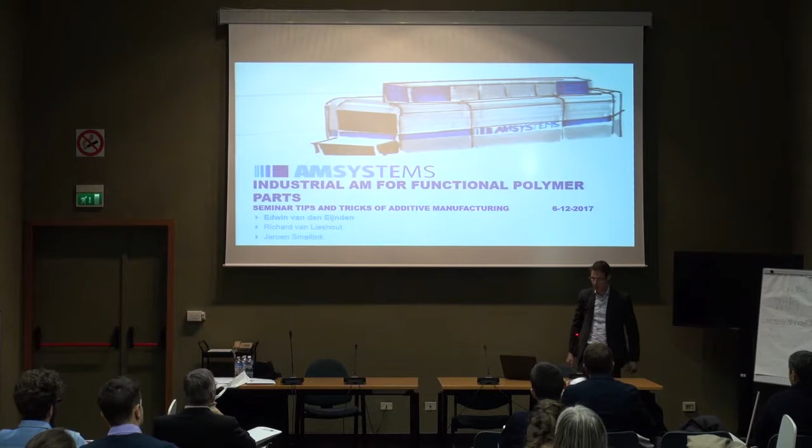I will give a presentation on our activities in additive manufacturing. I work in a department at TNO that develops additive manufacturing equipment, and we focus mostly on polymer printing, but I will also show some other activities in this field.

To give you an overview of my presentation: first, we have an initiative collaborating with the Technical University of Eindhoven, which we call the AM Systems Center. I'll come back to that. For AM it's important to keep the application in mind, so I'll give you an application for additive manufacturing we're looking at—automotive polymer spare parts printing—and explain why we think this is a good proposition.

An important aspect in meeting the requirements for these spare parts is cost, and I'll give you our roadmap on reducing this cost. The second part is quality—it has to meet the demands. But we'll have to see how far I get, so I won't rush. I'd rather get the first part right than rush into quality control.

So starting with this initiative: we at TNO focus more on applied research, while the Technical University works a lot with PhDs and postdocs. Together we have a broader proposition—for early research we can put PhDs on the topic, and later we get more involved as TNO to make it applied.

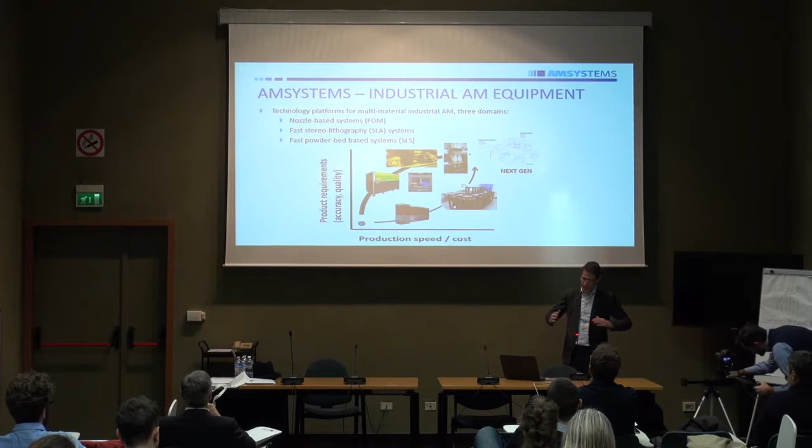We also have a part working on selective laser sintering—I'll explain that technology in more detail since it's too important for the story to skip. There, we mostly work on throughput. In the end we want both quality and throughput to come together, with good quality and a good cost price. That's the next generation, Printvalley 2020, which we're working on.

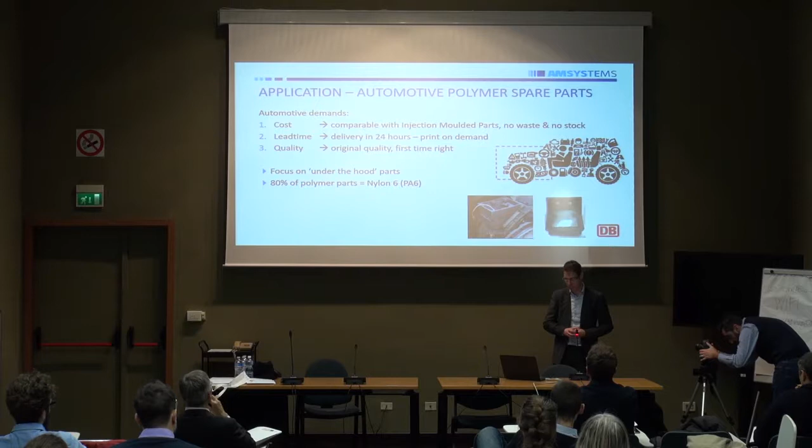To tell you more about the application we foresee—automotive polymer spare parts—cost is an important topic, and it's very hard to beat injection molding for large quantities. But I visited warehouses where spare parts are stored for years, and not all of them are sold; some are scrapped. Taking all this cost together, we believe AM could be an option by printing on demand. But printing on demand doesn't mean waiting a week for spare parts—we aim for 24-hour delivery.

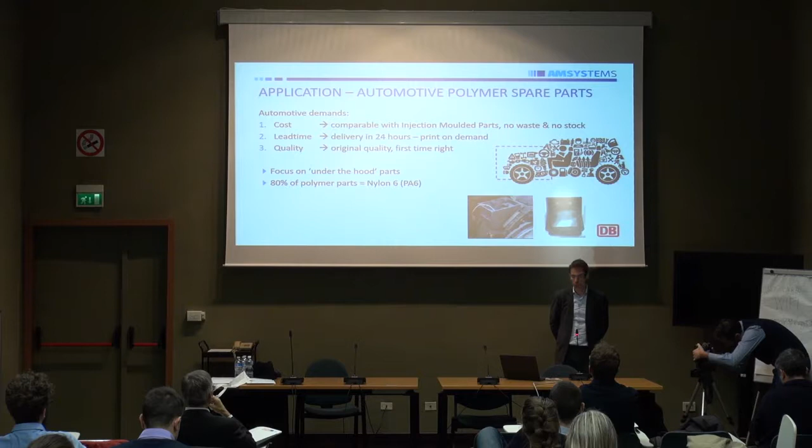For automotive parts, the quality has to match the original part, and this is still a very broad topic with a lot of aspects. Where we want to focus first is on under-the-hood parts, where PA6 nylon parts are already used a lot due to their high temperature resistance. PA6 is a material that can be processed with selective laser sintering.

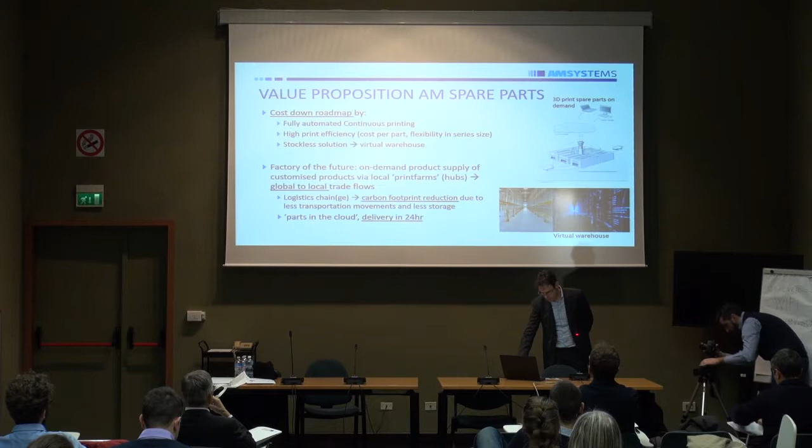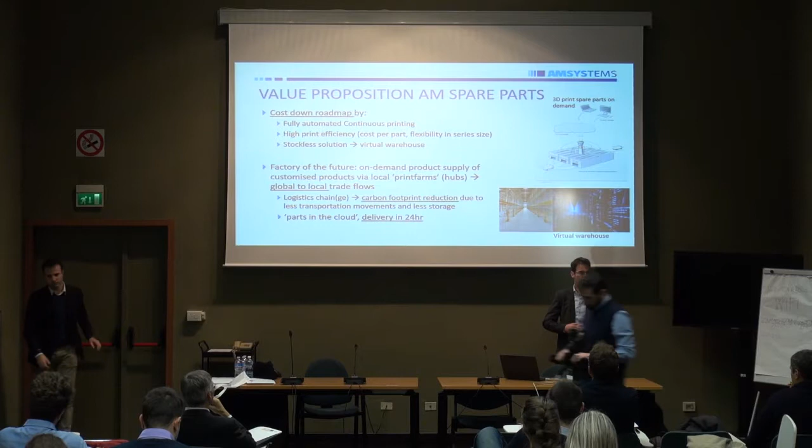How do we think we can realize this? The process now takes quite a long time, more than 24 hours sometimes for printing, and even then it takes a lot of labor to get to this product.

So we're aiming for a high-speed printer and also to automate some of the post-processes. By printing faster, we're aiming at 24 hours so we can deliver without storing parts all the time, but print on demand. The idea is that you have regional hubs and print at the region where you need the parts. Of course, this is still

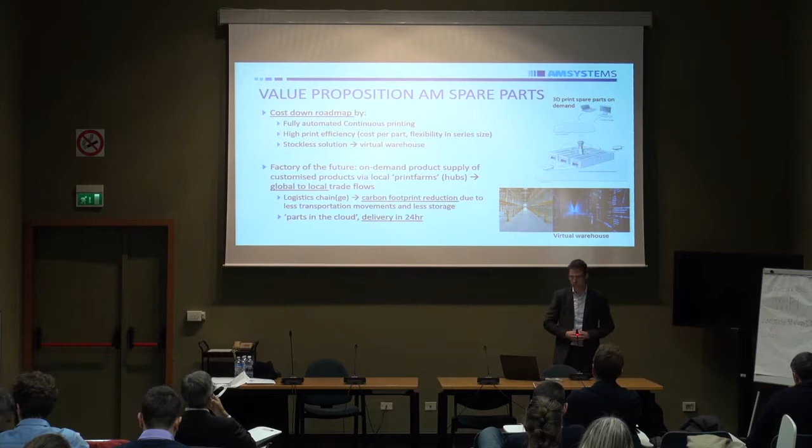not reality. So looking at the chain now, you see a spare part, you see these big warehouses in the middle, and then in the end you have the automotive transportation system.

What we foresee is that you print it on demand, and to make it cost competitive compared to injection molding - making an injection mold for one part is not very cost efficient. But for AM, it is. It doesn't make a lot of difference in cost if you make 1 or 10 parts.

So what you typically see is that up to a certain number, AM could be attractive, and now we position it at 1,000 to 10,000 parts - I think that's already quite high. And of course also the complexity: with AM you can make very complex parts, even parts you can't do with injection molding. That aspect is also important for metal printing.

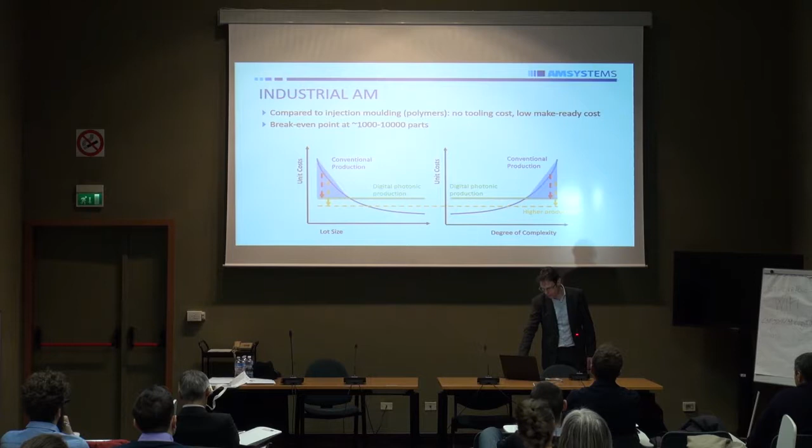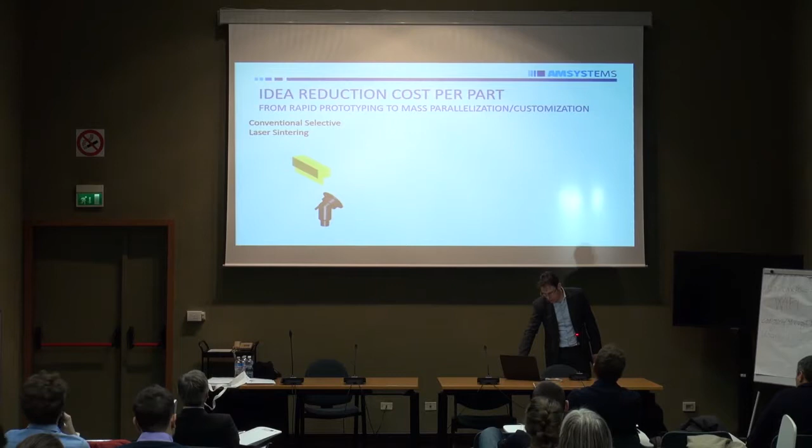So our proposition is to reduce this cost per part. What's the idea? If I go to selective laser sintering, the steps are coating a layer of powder - polymer powder, typically PA12, but it can also be PA6.

Then preheat it, and then selectively sinter the powder particles together, and then go to the next layer, as you saw in the animation. But typically these 3 steps - recoating, preheating, sintering - are done in series. And of course you can make these process steps quicker.

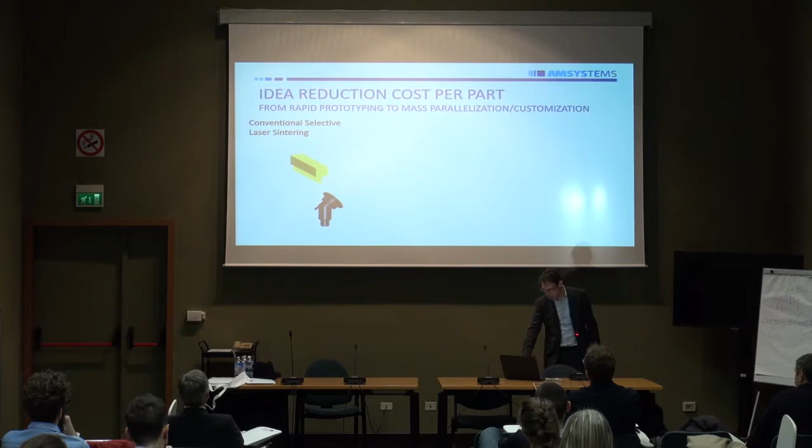For example, if you make the process steps 3.3 times quicker, the whole process is 3.3 times faster, as you can see here. But

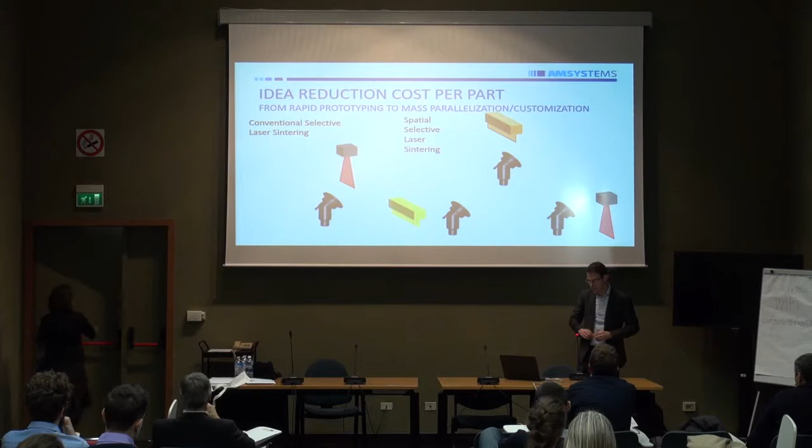what we work on is not having one build chamber moving its processes over the build platform, but having your processes fixed and moving your build platform from one process to the other. Here you see these 3 process steps next to each other, with 3 build chambers in this example, and the build chambers are moved from one process station to the other.

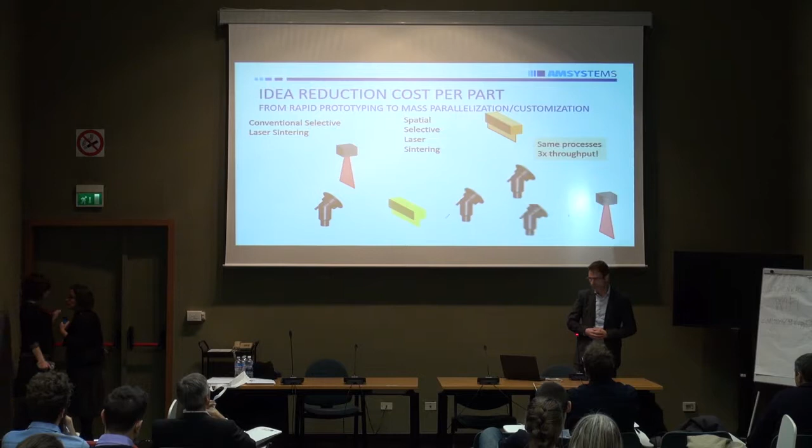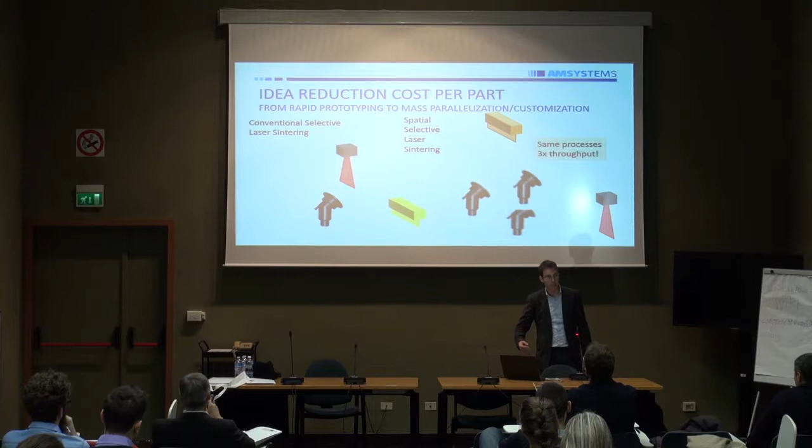So if you have the same processing speed, you already have 3 times the throughput, because in the same time you have 3 build boxes being manufactured. But if I now make my process 3.3 times faster, the throughput gain is 3 times 3.3, so you have an increase of 10 times. That makes a much bigger step.

Then on the automation and labor part, what you typically see now are a lot of standalone machines. I already see on the Formnext some steps, like a robot picking out the build box, maybe with AGVs too - but typically you have a lot of these machines and you have to handle all these build boxes. Our vision is more to go towards build boxes moving all the time through a lot of process stations, and we think automation of this system would be easier.

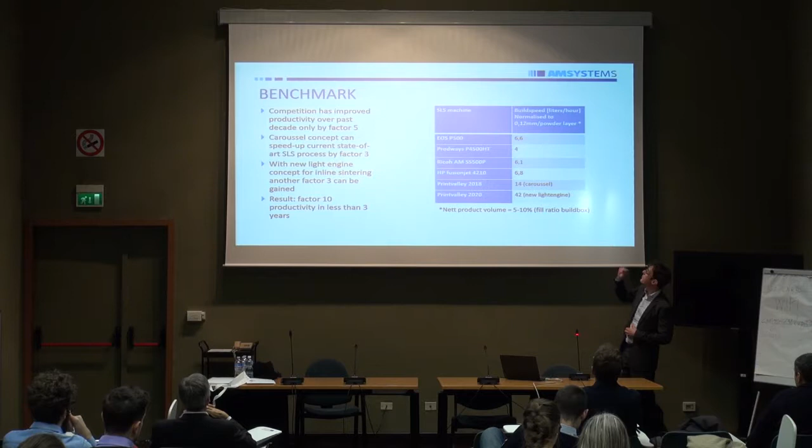To do some benchmarking - how do you compare these different systems? We do that by how many liters per hour of product you can produce. For example, this new system, the EOS P500, in the brochure they say they can produce 6.6 liters per hour. And the other systems, if you look at the Printvalley,

with the same process you can make almost a factor of 3 improvement, so you make a big step in throughput. And that's even with the carousel. If we speed up the processes, you don't just get the 3.3 gain, but a factor of 10 - so 42 liters per hour becomes realistic. That's a big step.

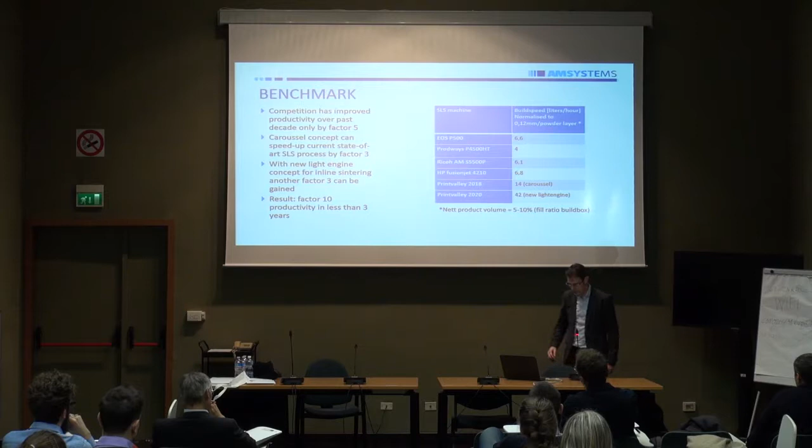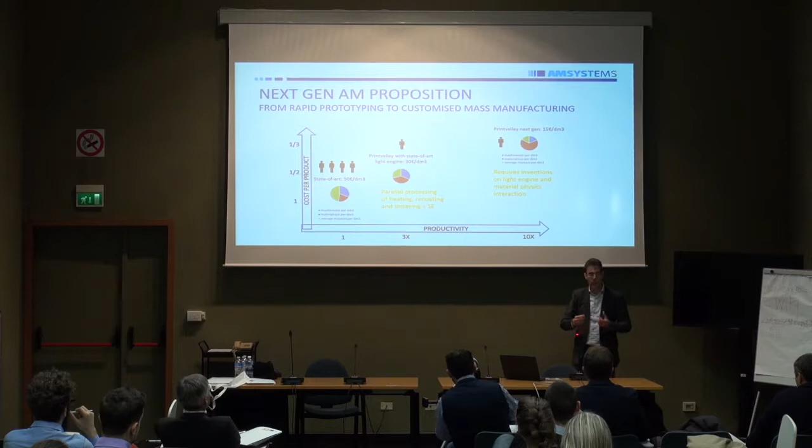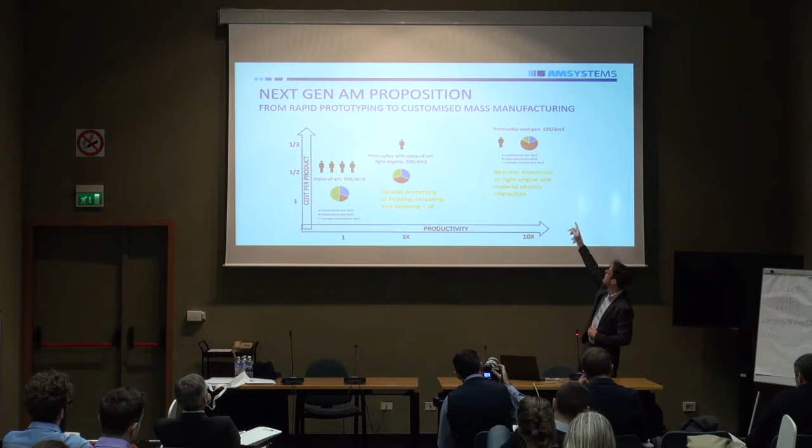Because machining and labor is still an important part of the total cost. If you go on, this labor and machining become smaller and smaller, and at a certain moment it doesn't make sense anymore, because really the big part of the pie is material cost. So the next step would be to reduce material cost. But still, you made a big step in cost there.

We saw a research project on the internet that compared the two technologies, asking quotes from hubs that used SLS and hubs that used Multi Jet Fusion technology. Surprisingly, the cost was quite the same for low and medium numbers. What was different was the lead time. With Multi Jet Fusion, they could provide the product in 4 days instead of 7. So a step is made, but not really a breakthrough in cost at the moment.

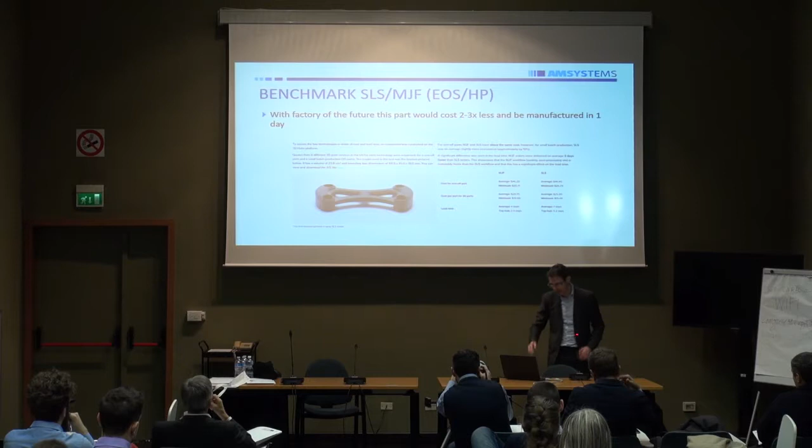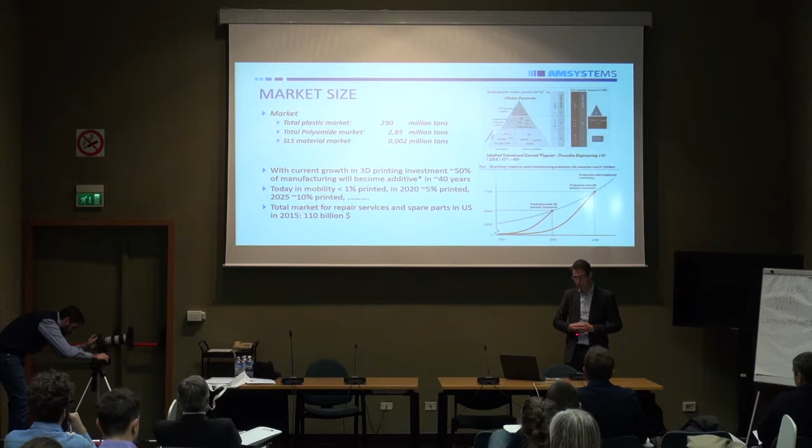But recently a big Dutch bank published a report foreseeing very big growth in additive manufacturing. Of course that becomes important, because now it's still quite small, but if you believe these figures from ING, in 40 years or in 5, it becomes really an important share of the total plastic production.

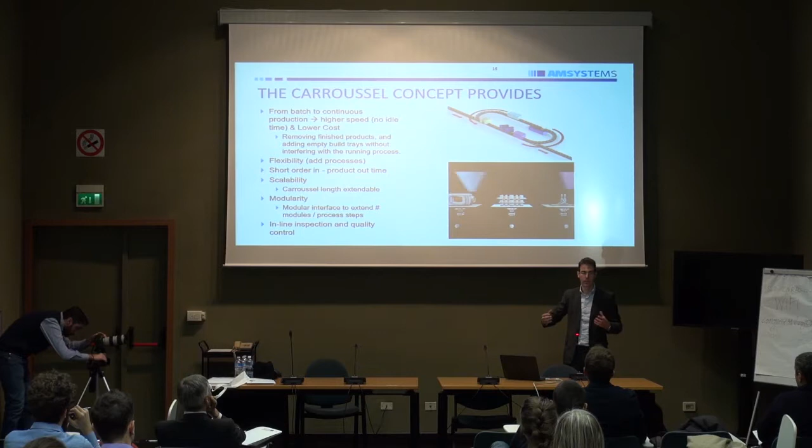So to come back on this carousel approach, why do we do it? One reason is you can put these process stations in parallel. You can also scale it, make the carousel bigger, add more process stations. You can even add more processes. For example, now we discussed recoating, heating, and sintering.

You can do inspection, or for example add electronics, an additional material. If you did that in the traditional way, it would cost a lot of additional productivity because you added more steps in series. But here you can do it in parallel, just by making the carousel bigger.

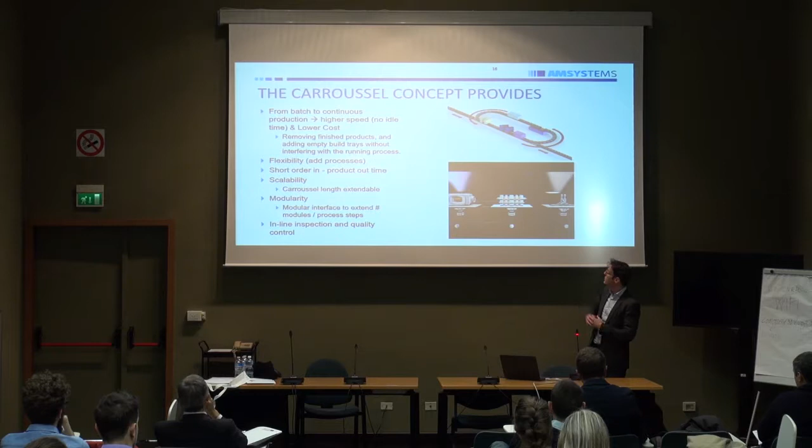So the movie you saw was really a vision in the beginning, but we also have actual builds, not just animations. I'll show you later the generation recently finished in an EU project. But the first generation, I think the project ran around 2009. It was more on inkjet printing, and we printed a photopolymer UV resin, and later wax print heads, but it was not really additive manufacturing—more like putting processes in parallel than making a true 3D printer.

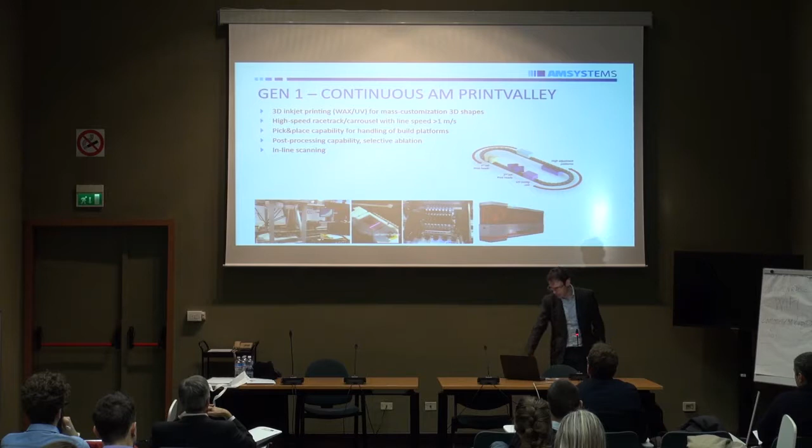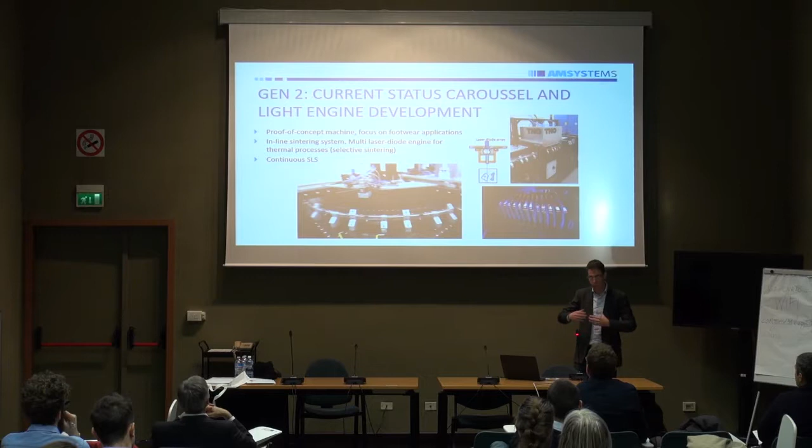In the second generation printer, we didn't print, but moved to selective laser sintering. The innovation there, compared to generation 1, was that these build boxes could be moved individually with different speeds. Another innovation: normally you have only one laser source, but with selective laser sintering we moved to a laser diode array of the complete width. I'll come back on that later.

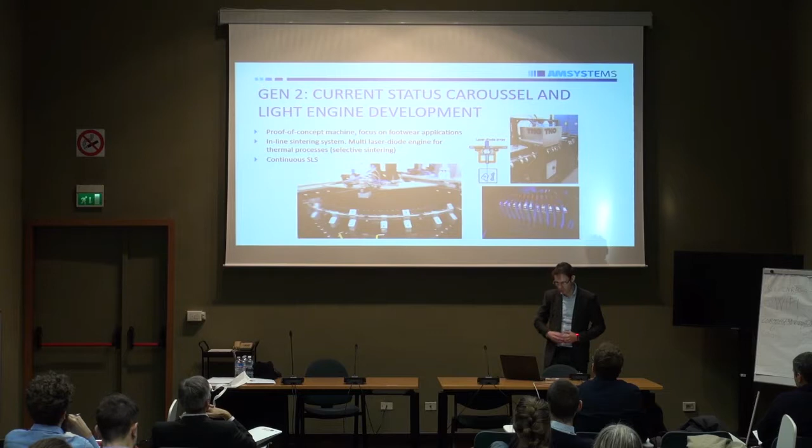Here you see how these build boxes can move, and everybody asks, can your processes keep up with the speed? Up till now, not, but of course the build platform shouldn't be the limit, and you can see it can move quite fast. On the right picture, which I'll come back to later, is this light engine we developed, and you see it also on top.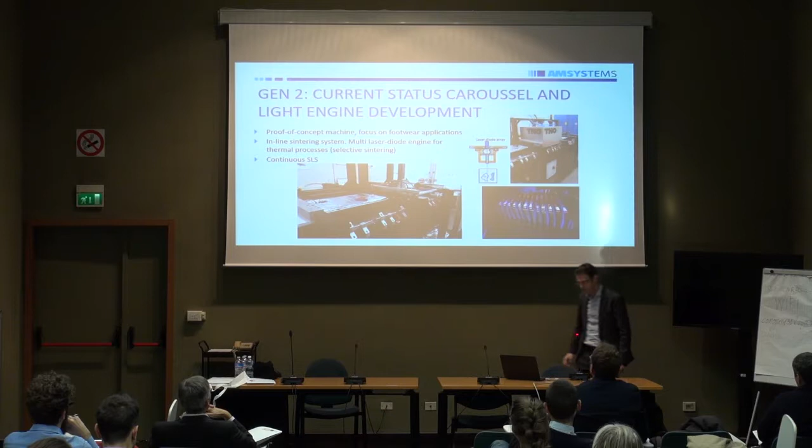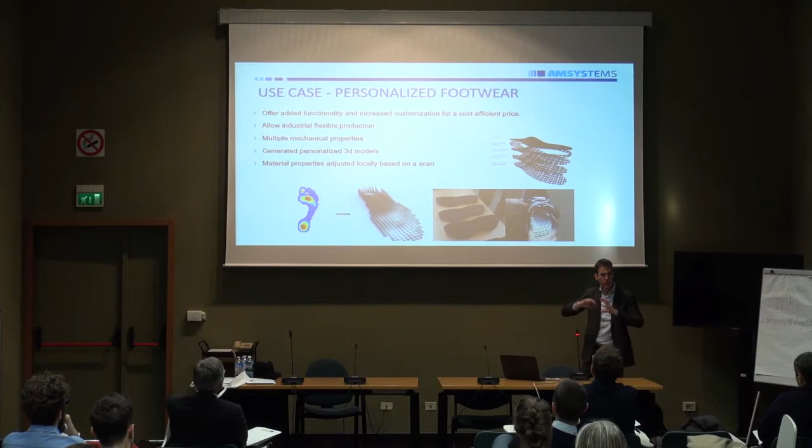So what was the application? It was the Additive project—maybe some of you know it. The application was printing insoles. You can imagine that for insoles, customization of your product is important, and you can even change the stiffness. As you can see, it's really like a lattice structure, and you can change this lattice structure to adjust stiffness where you need it.

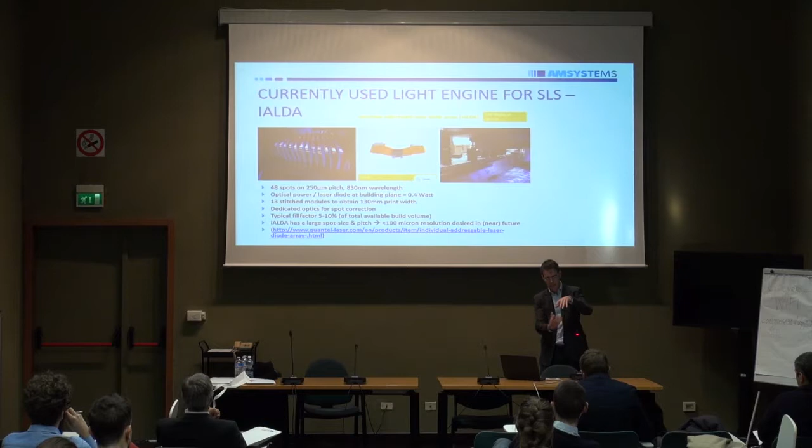So to tell a little more on this light engine, because that was also a big step: we looked for commercially available laser diodes, and in the end we found an IALDA module. It consisted of 48 spots, and we developed the optics and control around it. In the end, we had 13 of these IALDA modules parallel to each other, covering 13 centimeters of product. By moving your build box, like the insole, in the length direction underneath this light engine, in one go you had the complete sintering.

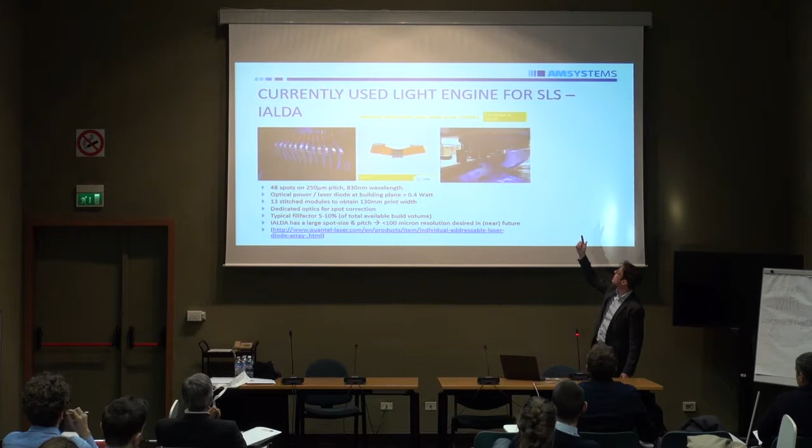So here you see this build box moving. You see these spots - each laser diode gives one spot, because with this demo they are all put on, and in the end you get complete sintering.

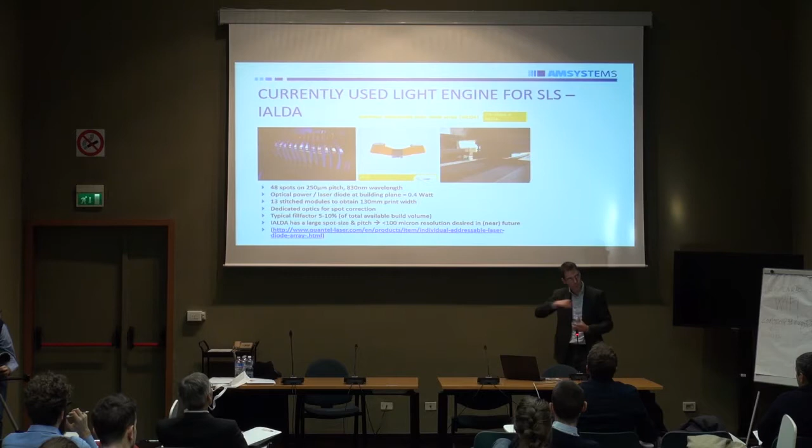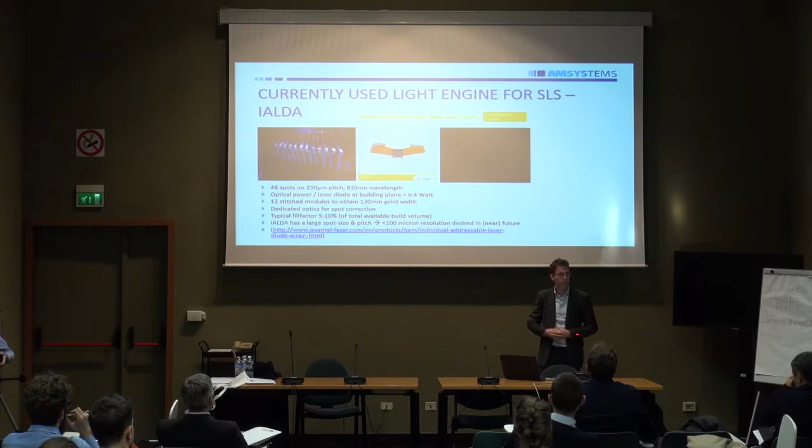What is important here is the speed is not that high, if you can see it. You saw these build boxes going very fast before, but this is not going so fast. To make it faster, you need the right power of these laser diodes. Until now, this generation we believe is competitive with the current CO2 approach, but it's not really a big step. To make it a big step, these laser diodes and this light engine have to be improved - I'll come back on that later.

In the beginning I said there are two parts, quality and cost, and at the moment we're working on the Print Valley 2020, so it's really a new development. I'm the project manager of this project, and we're finalizing the designs.

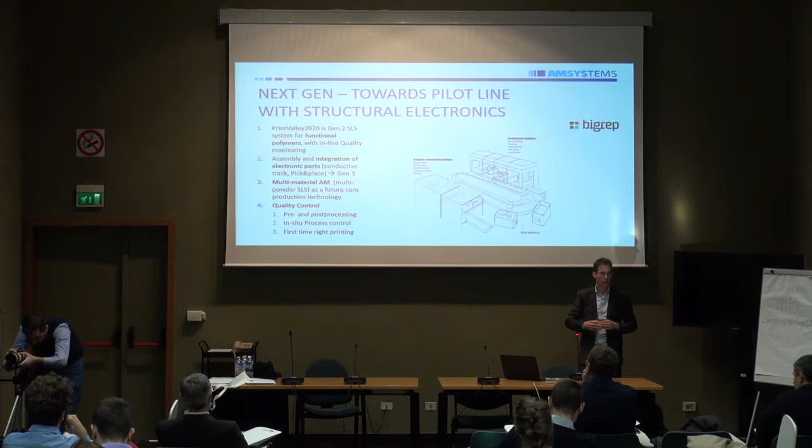What we're adding here is more processes. We had these SLS process steps like recoating, preheating, sintering. Now we're adding integrating electronics, so the build box can move to a station where electronics is integrated, and it can do multi-material, so you can have more materials during printing. The third step is also inspection, that we do inspection during printing.

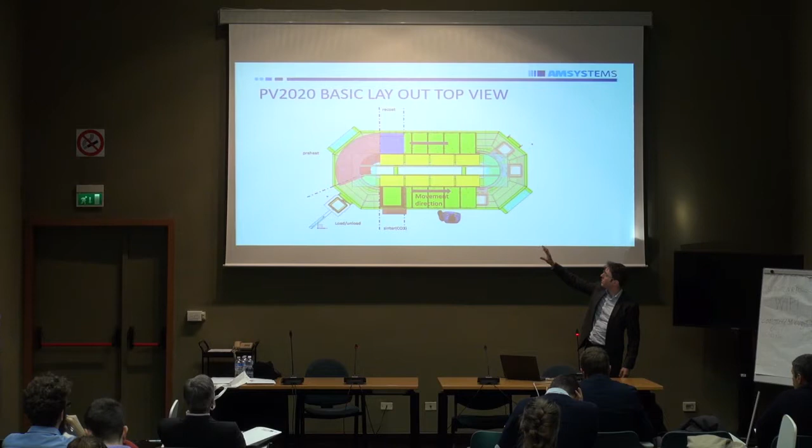This is the top view of the system. What you see now, we have a sinter station, a recoater, and preheating in the corners. And of course you will need to load and unload build boxes without interrupting the process - you see it on the left below.

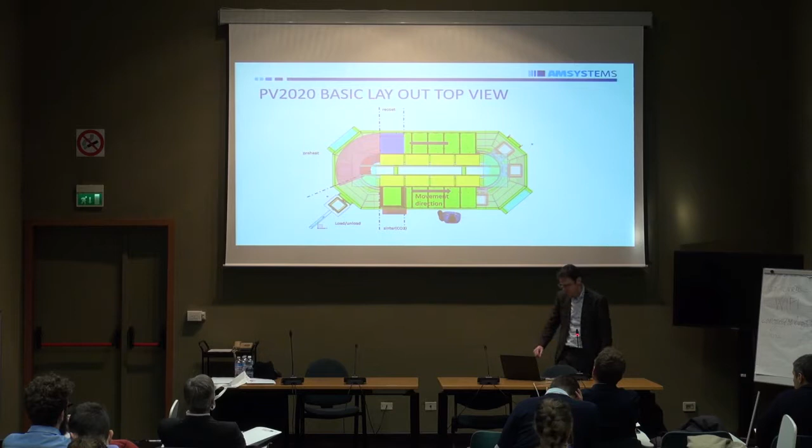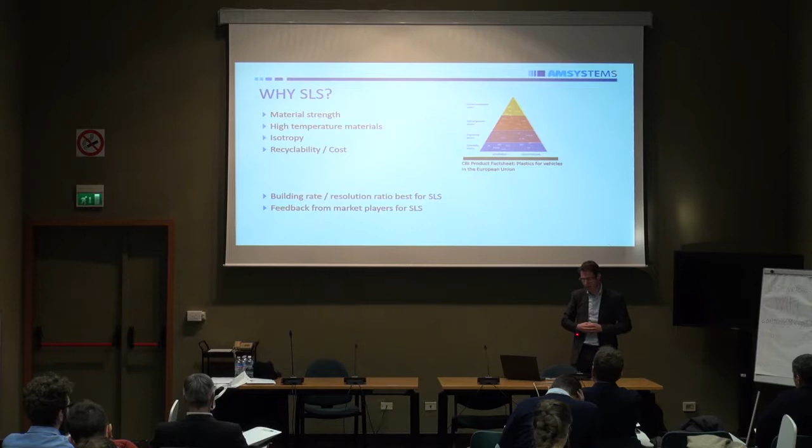Maybe I went too fast - I'm talking about selective laser sintering, but why did we choose it? We see that service providers making polymer parts do a lot with SLS, because it has quite high material strength. If you go to PA6, you can handle high temperature materials. Isotropy is good, and the material is recyclable - that was also an important one we got from partners. That is an important topic, since with SLA it's more tough.

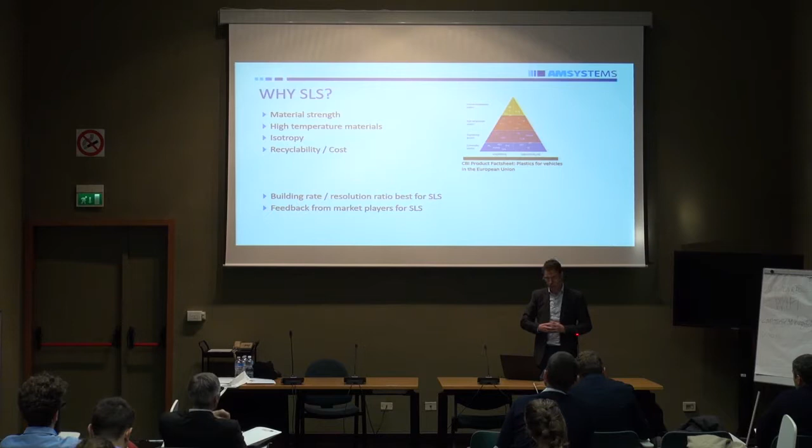And of course you can have fused deposition modeling printers with very low resolution that build very fast. But with this technology, you have a good combination of resolution and build rate.

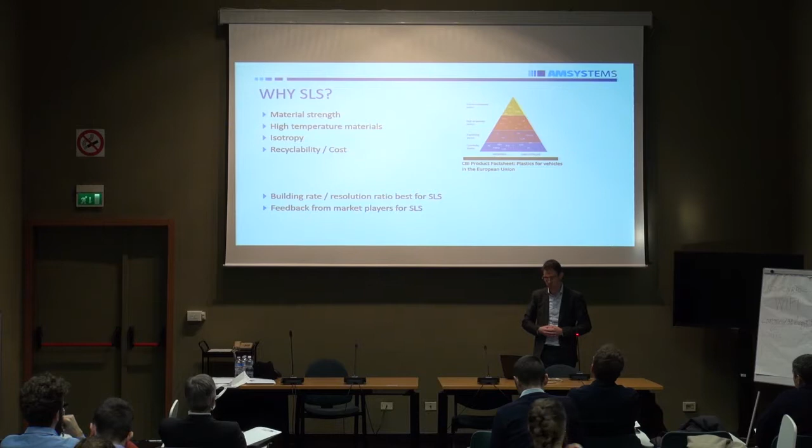In my example, in this animation, I showed 3 build boxes. Actually we do simulations to determine how many build boxes you need for a certain carousel setup. You can imagine that depends on the process times, how many processes you have. These simulations are done like this: for example, you start with 1 build box and increase the amount up to 12, and look at what's happening to the throughput of the system and the lead time.

But if in this setup you use more than 6 build boxes, then it really increases the lead time, because these build boxes are in buffers waiting till it's the right moment for the sinter station, for example. So it's a balance of how many build boxes you need.

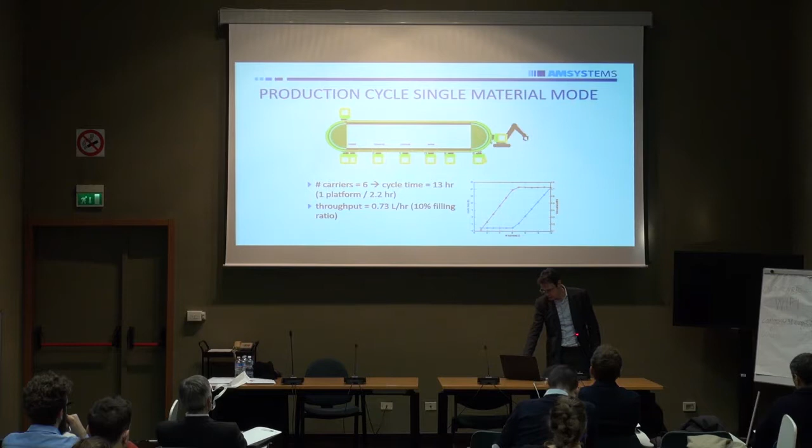Of course, I'm now talking only on the printing aspect. I already said that there is more to do to come to a final part. One is, for example, this box is very hot when it comes out. You have to cool it with the right rate.

You have to get the powder off. In the beginning, all the products are really surrounded by a lot of powder. You have to get rid of it. And of course, you want to recycle this powder, so you have to get it ready for the next job, and you mix it with new powder. So these steps also have to be automated.

For the moment we are focusing more on the printing part, but we already have first concept setups also for example, for getting rid of the powder, more automated. So this is on this continuous setup. In order to make this factor 10 in throughput, we see that a step has to be made in this light engine.

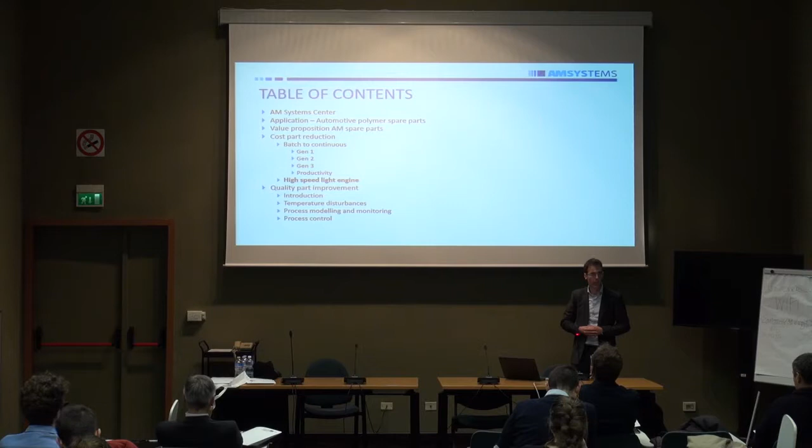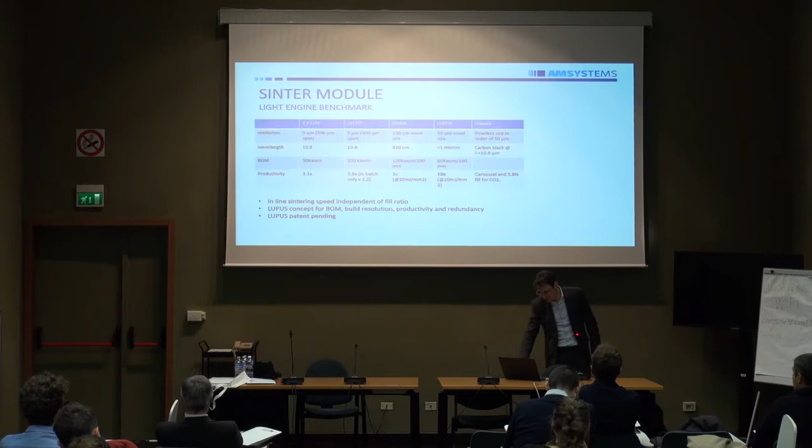For example, to compare the different possibilities to go to a fast light engine, traditionally they use a CO2 laser with a galvo. So they have one laser spot and they move it very fast across the surface. A normal solution would be, if you want it faster, take 2 of them, and that is also the solution you see in the market. Typically, like 2 CO2 lasers is very common.

But if you look at this line array, that's still new. You don't see that so often.

With this IALDA, that is not the big step to make, and we're looking at what we call Lupus. If we can increase this energy density, the watts per square millimeter, to a level that you really can beat a CO2 laser. And that's not only in performance, you also have to keep track of the cost. For very high throughputs, it becomes easier because the CO2 approach really scales with the amount of CO2 lasers and galvos you need.

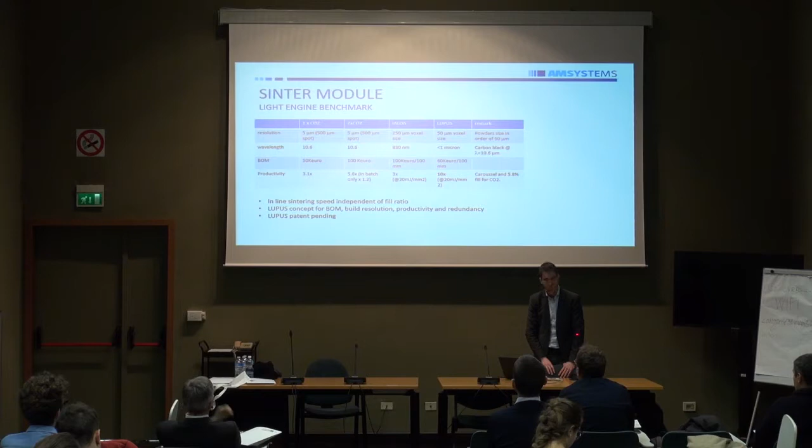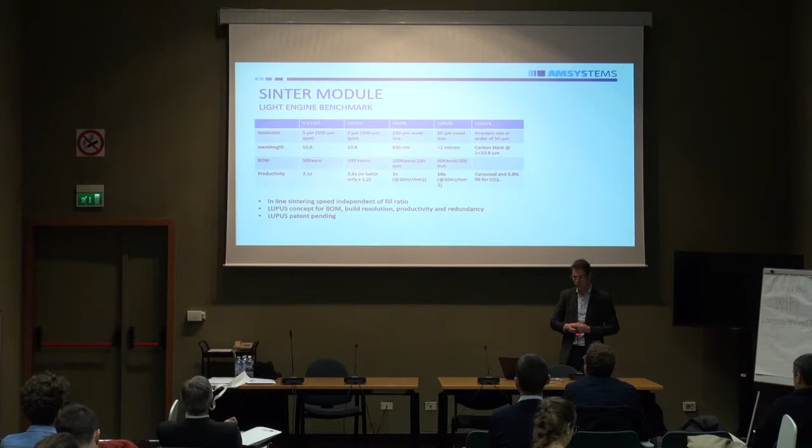But what you maybe typically see with these line arrays is that you go to another wavelength. CO2 lasers have a wavelength of about 10 micrometers that absorbs in polymers very well. These lower wavelengths almost do not absorb in polymers, so you have to add absorbents.

What is an important aspect for this comparison between this line array and this CO2 laser is the fill ratio, and I will explain why this is a really important part.

What you see on the left here is a typical build box. They prepare it to stuff as many products in a limited volume as possible, because then you utilize the process as good as possible. But still, when you do that and somebody is really putting a lot of effort in it, the typical fill ratio is between 5 and 10%. So 95 or 90% of the powder doesn't have to be sintered.

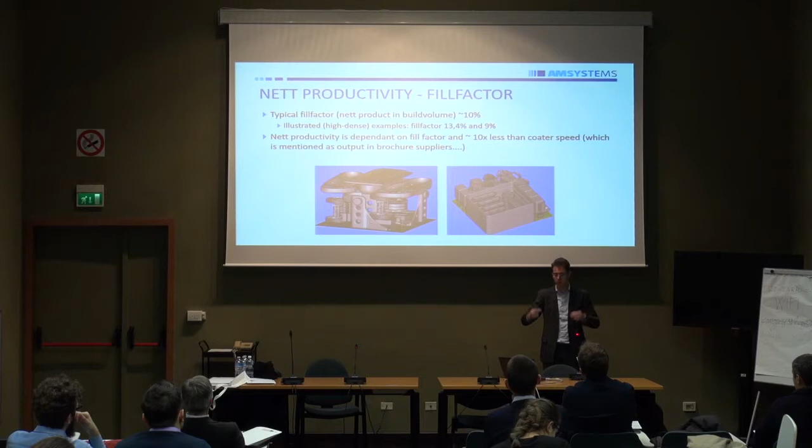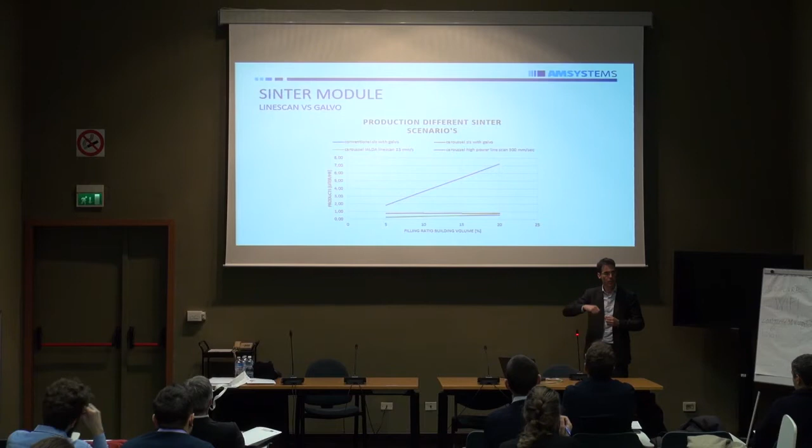With a line array, it's just as easy to sinter all the material as to sinter only 5 or 10%. But for the CO2 laser, it makes a lot of difference, I will show that with this graph. For the CO2 laser, more fill ratio takes longer sinter times, but higher fill ratios with this line array don't matter. You can move it with the same speed, even when it is 100% filled.

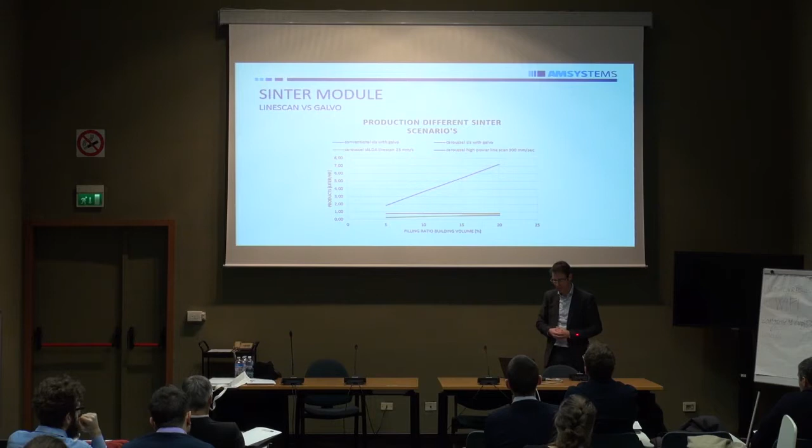But we cannot make a job 100% filled. Then you make blocks, and that's not the goal of AM. So you're stuck to this 5 to 10% for the moment, and you have to compete with this CO2 approach given that constraint.

Maybe also you can put this fast light engine in a standalone system, or you can put it in a carousel. With the standalone system, a faster light engine gives you faster process speed, but the increase you have is only limited. We put it in this graph.

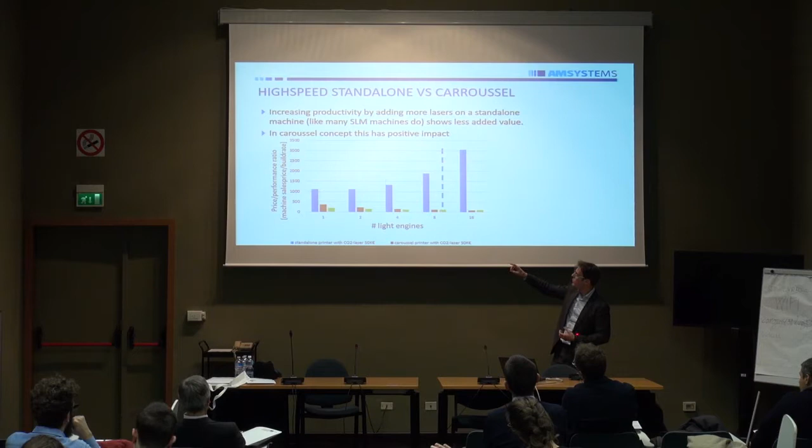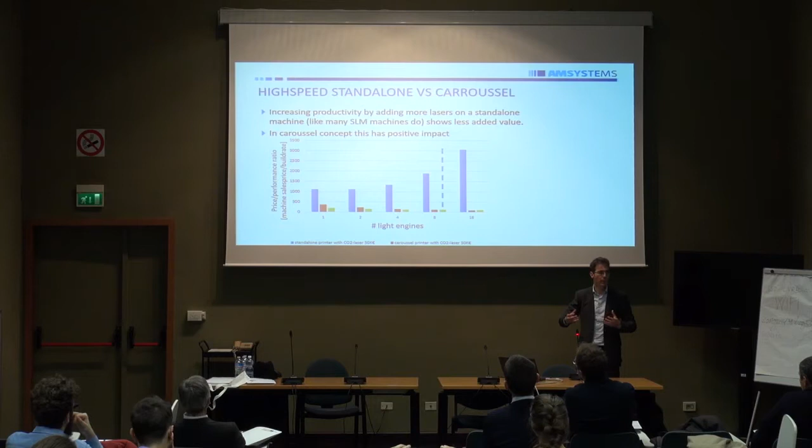So for the standalone printer, the price-performance ratio is not really improving when you have more CO2 lasers in a standalone system. But if you do it in a carousel, you can utilize 100% of your expensive light engine, and then it makes a bigger difference in cost reduction.

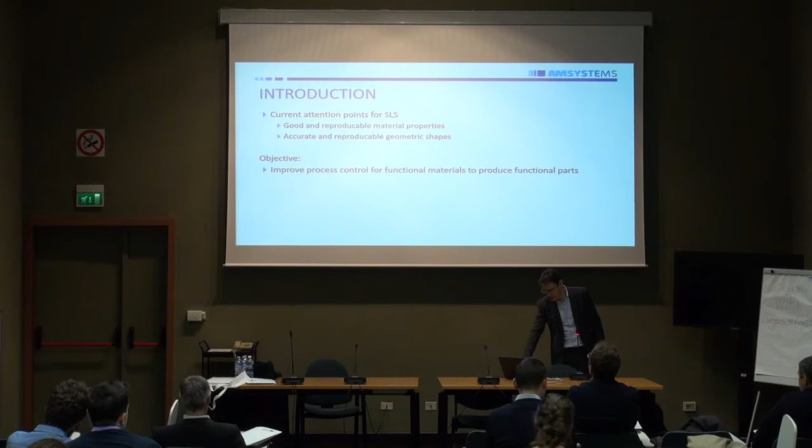What is the attention point for selective laser sintering on quality? Of course, the material properties are important, and the other is that the shape has to be very precise. We believe that with process control, you can meet these functional material demands and get more accurate products.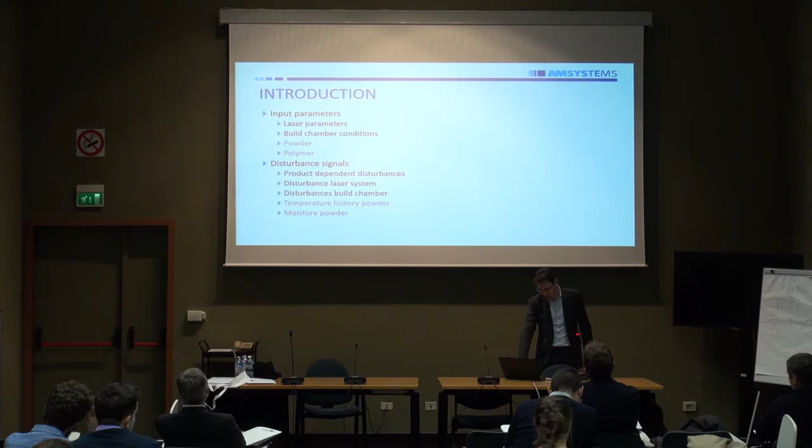Also the moisture content can change. So how do we measure these quality differences? We already did some work making a lot of tensile bars, and there you can measure, for example, the tensile strength, the Young's modulus, and the elongation at break. Of course, even at the current state of technology, it can be a failure that the build just didn't work.

Is your part geometry accurate? And is the density correct?

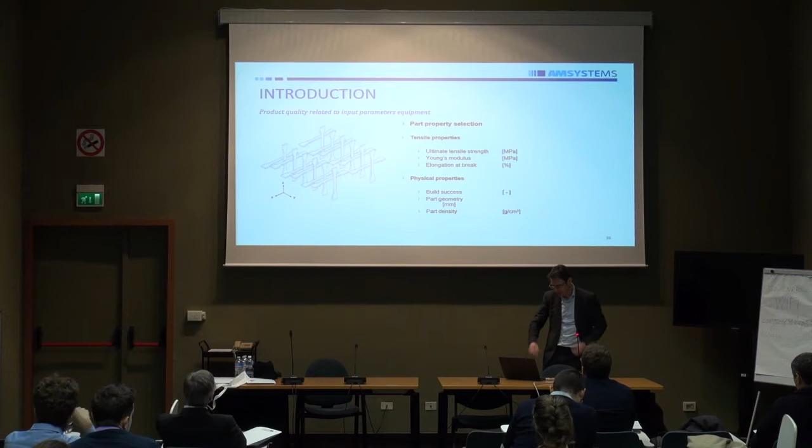So what we put in this graph is, on the horizontal axis, the energy input - for example, you can change the laser power - and on the vertical axis you have the tensile strength of the tensile bar that we printed. What you see is, if you have a very low energy input, the layers just really don't stick to each other. If you put it higher, then you go to an optimum.

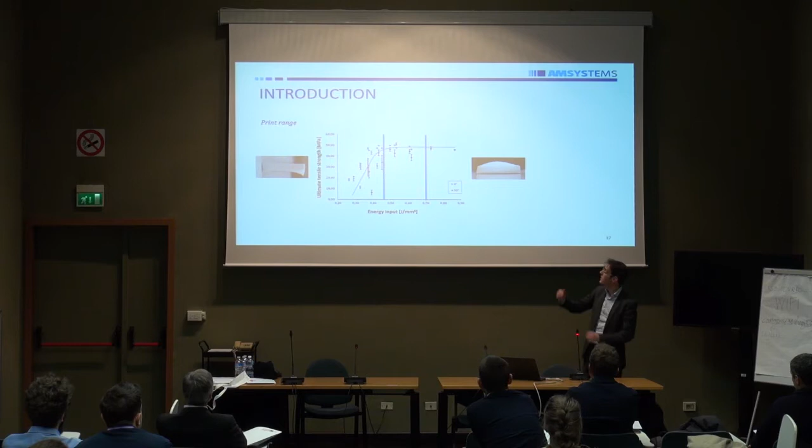But why not go to a very high value? I will show you why. If you put it very low, you see this delamination, which is not good. But if you make it very high, you can see - I think it's upside down - you can have a lot of extra melt of material on your product, which is also not wanted.

So what you would want is to stay in your optimum process window. Right now, everything is kind of open loop, so you just hope it doesn't shift too much.

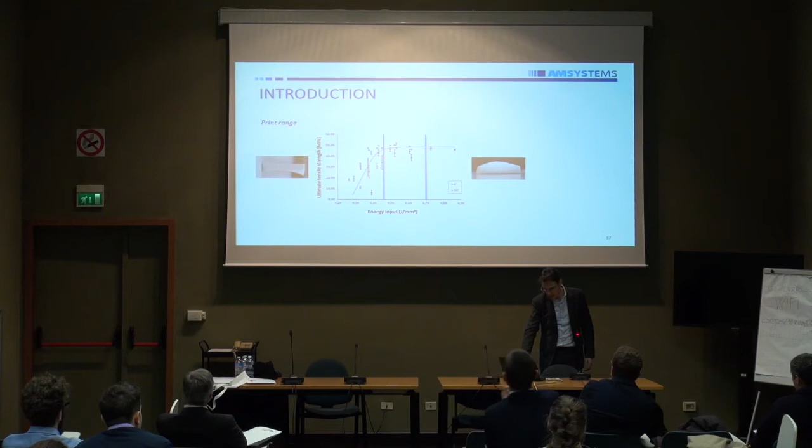I will show you, because we did quite some modeling in this field, especially starting with metal, since we started with a lot of metal projects. What we saw there is that, for example, this laser power you can control, but what you cannot control - or maybe you can - is that during your build, your product heats up. It doesn't have time to cool down, and then your material becomes hotter than intended, and your melt pool is different than when you just started.

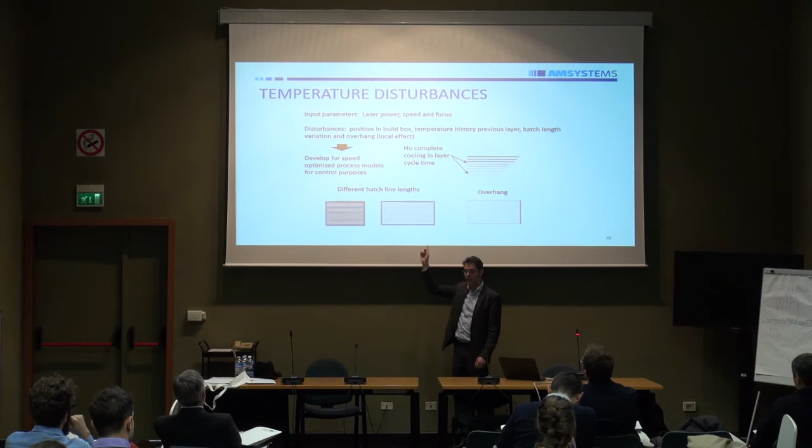So you see on the right, if you have these overhangs, for example with metals, your product can heat up. What we also found is that with the scanning of this laser, you have different hatch lengths - you can have very short hatch lengths, and the time to go from one side to the other is much shorter than if you have very long hatch lengths. That also makes a difference in the cooling time.

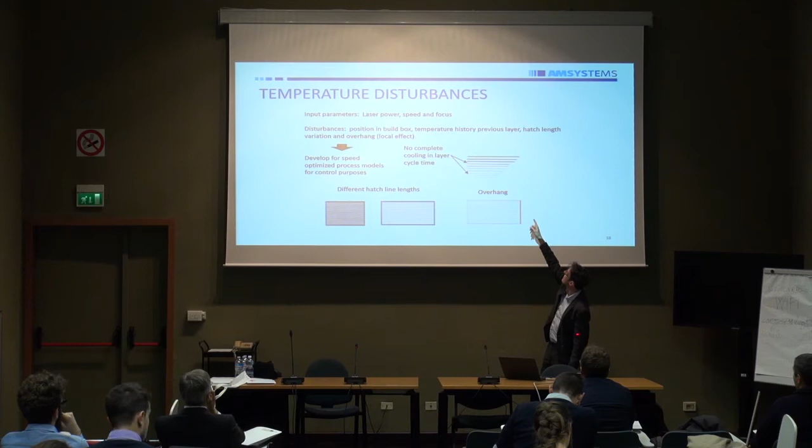I will show you an example of a simulation. We actually measured that also with pyrometers, confirming this is really an effect you can see. Here you see this overhang on the side - from the side you see the top one, and here you see it from the top view.

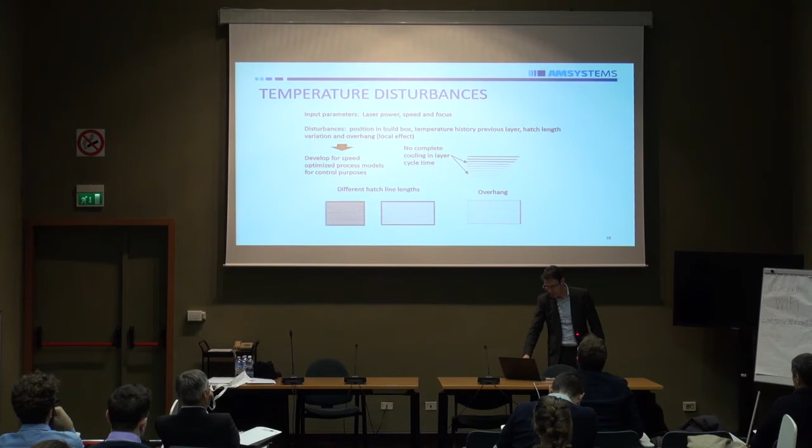If you make a contour with this product, here you have an overhang, here you don't have an overhang, and that will have an effect on the temperature. At the moment, a lot of these things are not compensated for. They're just one parameter set. Of course, you have some parameter sets, but not to compensate for all these things.

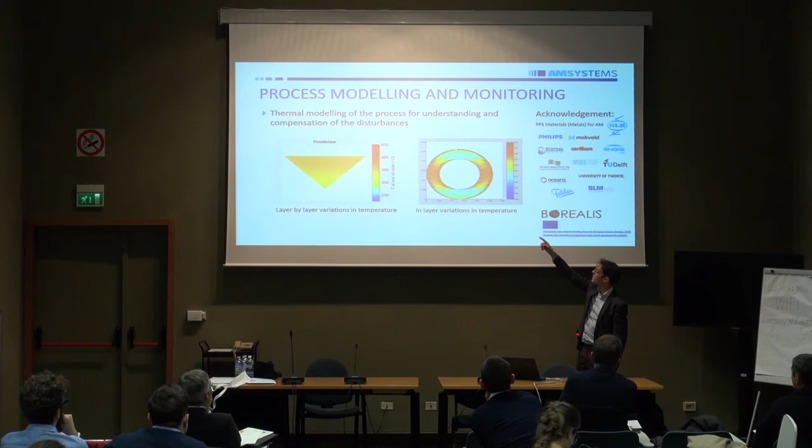Also, here you see the right one is a donut from the top, what you can print. You have long scan lines and short scan lines. What you see is that these short scan lines become much hotter because it doesn't have time to cool down. We also measured with pyrometers, and we saw that it is actually happening.

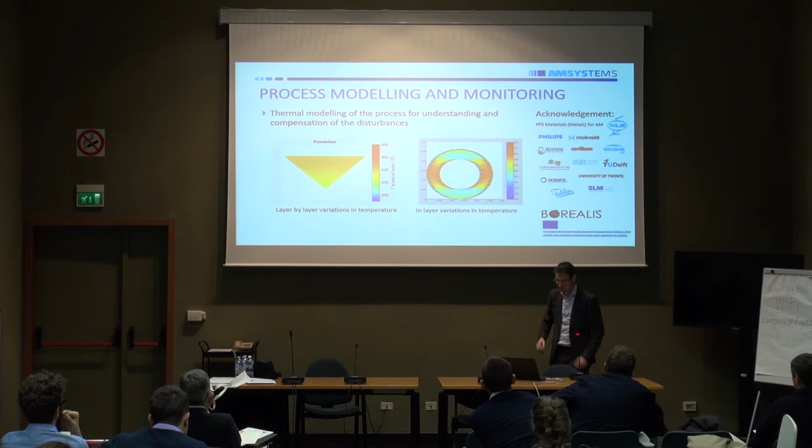And of course, not everything that is changing is a problem. There is some bandwidth there, you don't see it in the material properties, but you really have to know, is it within a certain boundary, or is it outside the boundary?

We also did now, because this was all done for metal, we still have to do the simulations for polymers, but we already did some measurements for polymers, where we used a thermal camera to look at the process during selective laser sintering. So what you see on the left is recently starting.

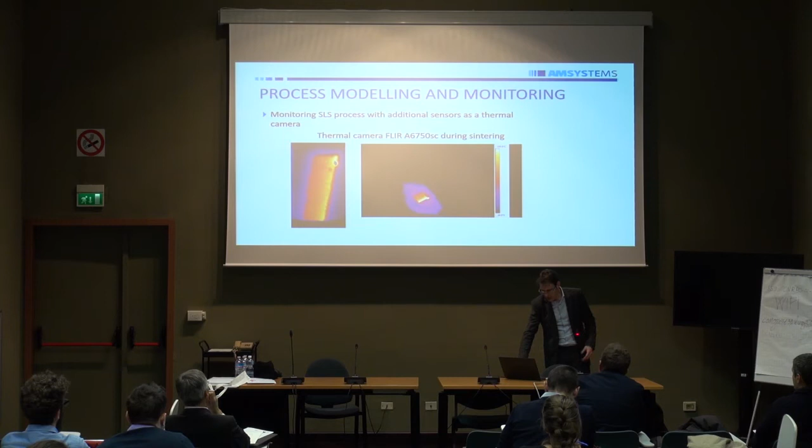I will wrap up. So what you see here in this movie is that there is a long time you still have this heat of this laser. So it's not like you melt it and then the temperature is gone. You really have a long history. And indeed, these simulations could also show that this has an effect for polymers.

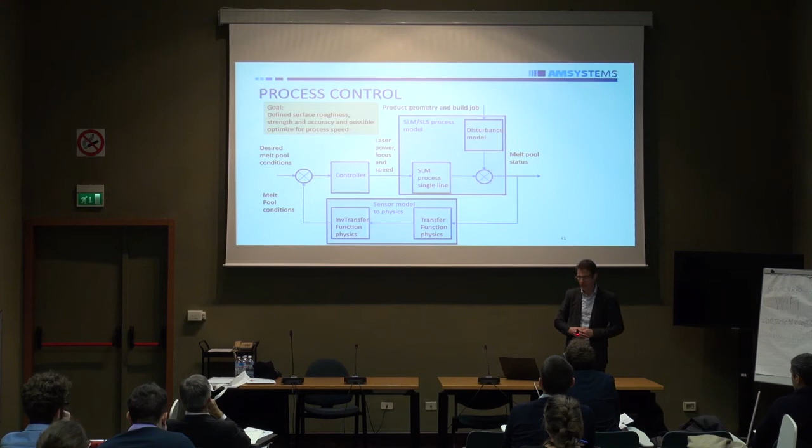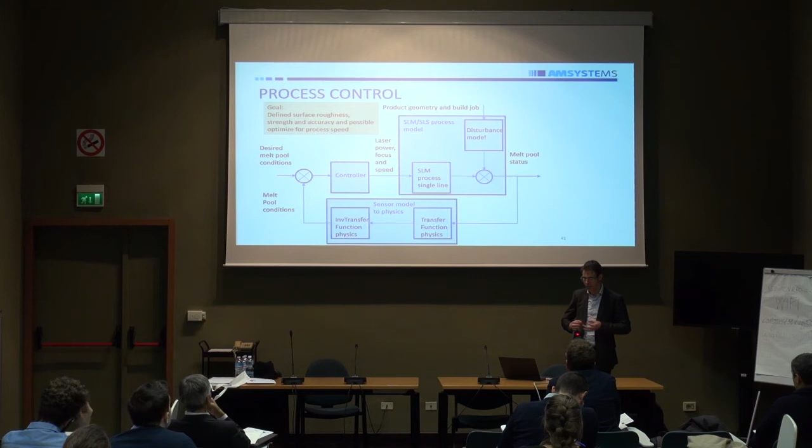Maybe the last slide. So in the end, what you want is to compensate for the disturbances. One could be using models, and the other one using sensors, like what I showed. And then we believe that it can have an important effect on better geometry accuracy, better material properties, and also first-time right build. I will skip this one. All right, thank you for your attention.